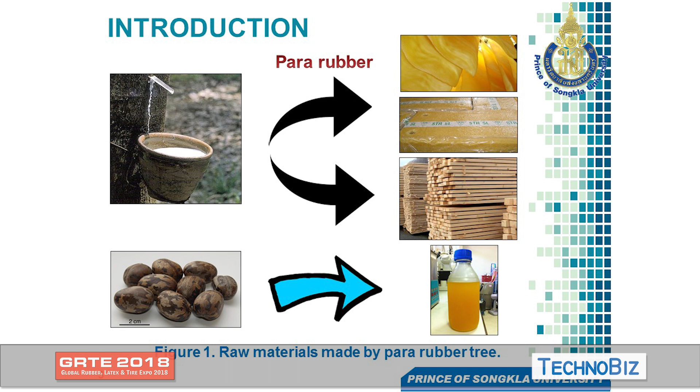Focusing on this one, we are focusing on the natural rubber itself. This is the chemical structure of natural rubber. So natural rubber has very unique properties. For example, strain-induced crystallization. Strain-induced crystallization can give remarkable properties to natural rubber. Even the cis isomer of natural rubber itself can give various advantages.

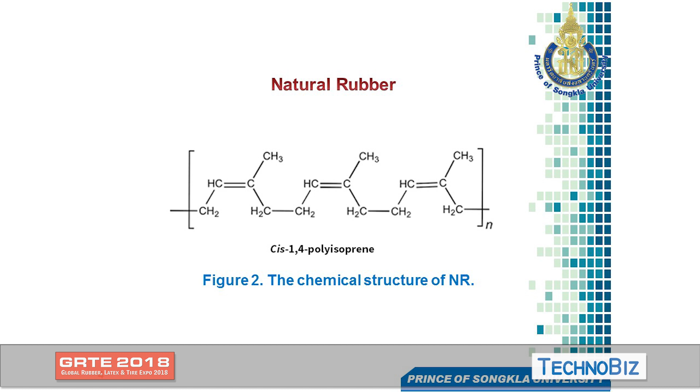Talking about natural rubber compared with synthetic rubbers, natural rubber can give strain-induced crystallization. At lower strain or lower deformation, nothing happens. It's just like SBR or synthetic rubbers. Once we apply high stretching or higher deformation, the stress upturns, sharply increased, meaning that there is strain-induced crystallization occurring in the natural rubber.

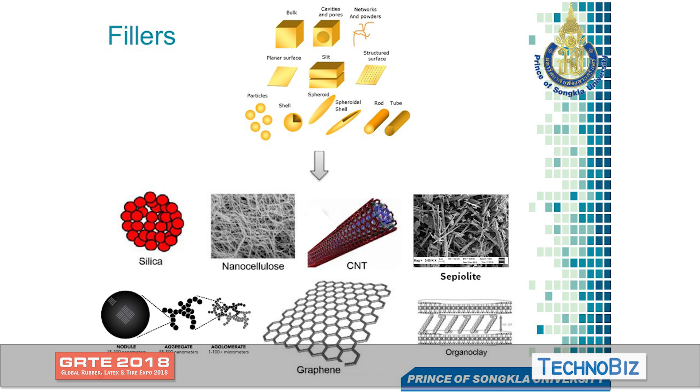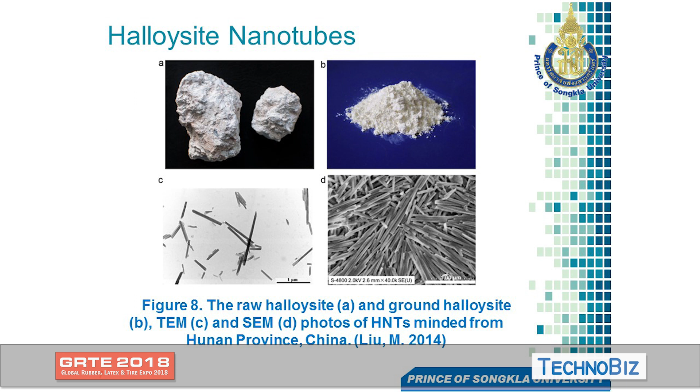Now I'm focusing on clay. So in my case, I'm studying the incorporation of halloysite nanotubes. Halloysite nanotubes are chemically similar to clay, but the difference is the geometry or the shape. Clay is normally stacked together and laminated. But in the case of halloysite nanotubes, it's different. It comes from a layer that folds, making hollow tubes, and the inner is just like this.

And it folds together into tubes. The inner surface consists of hydroxyl groups, and the edge also has hydroxyl groups, but the outer surface consists of siloxane groups. It's just like normal mineral fillers, clay or silica or whatsoever.

In this study, I'm focusing on the use of halloysite nanotubes in natural rubber and seeing what happens to the strain-induced crystallization afterwards. We have observed that halloysite nanotubes can enhance the strain-induced crystallization of natural rubber.

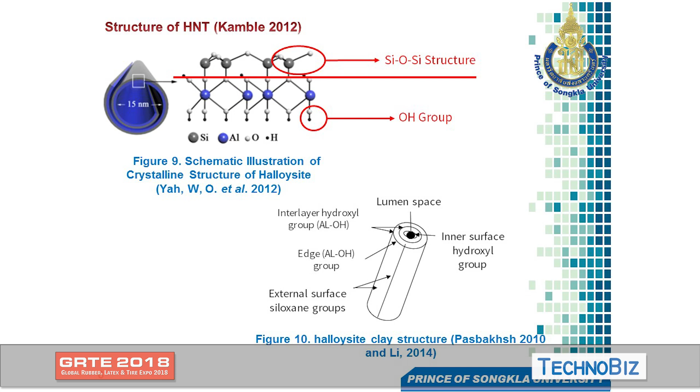Okay, before going to my experiment, let me briefly introduce some major factors affecting the reinforcement. Reinforcement means once you put the fillers inside the natural rubbers or other polymer matrices, it can improve the mechanical strength or mechanical properties. So there are some major factors affecting this kind of properties, for example, filler dispersion or volume fraction. Once we increase the volume fraction, the fillers will agglomerate or aggregate, making the properties drop drastically. There is a certain amount of fillers and certain dispersibility that can give optimum properties to the rubber composites.

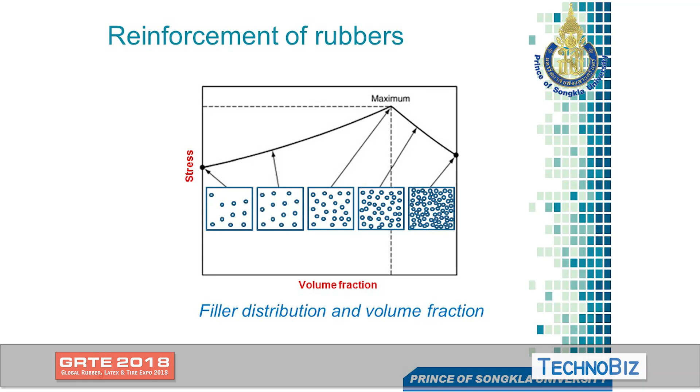Other than that, filler aspect ratio and filler shape or geometry, as I mentioned before, can also affect the properties of the rubber composite or polymer composites. Here we can see the fiber needle-like fillers. With a large surface area, it can give more contact area. Once there is more surface area, the contact area is improved, so the mechanical properties of the rubber or polymer matrix are enhanced by this kind of appearance.

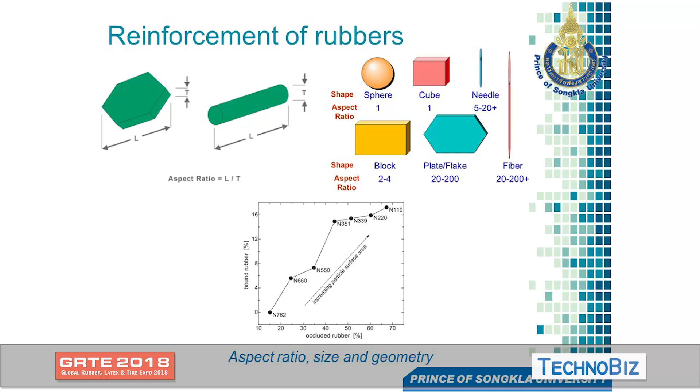So this is the example of the bound rubber content. Once we reduce the size of fillers used in the rubber or polymer matrix, it can increase the bound rubber content. So here is the example. We prefer as small as possible and as high aspect ratio as possible to make the polymer matrix stronger.

Once the reinforcement is there, normally we have to investigate the reasons behind the reinforcement. So normally we check the bound rubber content. The more bound rubber content, that means there are rubber-filler interactions. So we normally study the rubber-filler interactions in order to support the research findings.

Another thing is the Payne effect. Normally in this kind of study, we study over the strain amplitude. Once we input high strain, we see whether the filler network is there or not. If the rubber-filler interaction is there, the difference between storage modulus at lower strain and higher strain will be reduced. A small difference means high rubber-filler interactions.

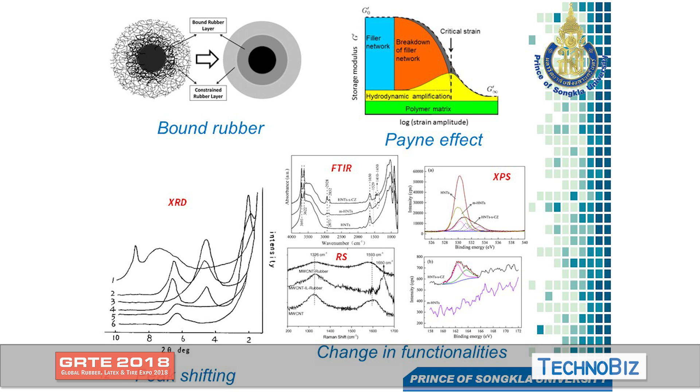Depending on the materials or what you are going to study, you choose either wide angle or small angles. So in my case, I first studied using typical XRD to see whether my peaks of interest are in the wide-angle range or not. Then we choose whether to use wide angle or small angle scattering.

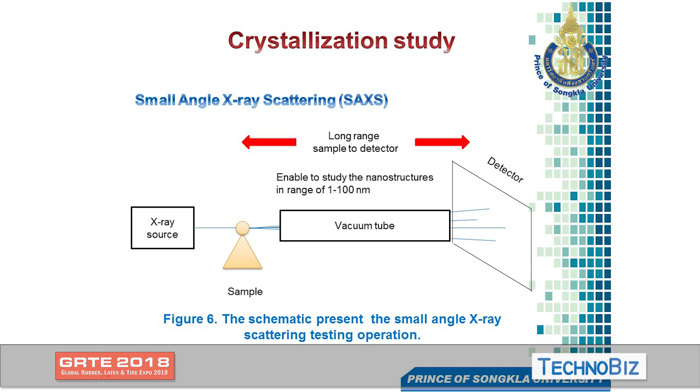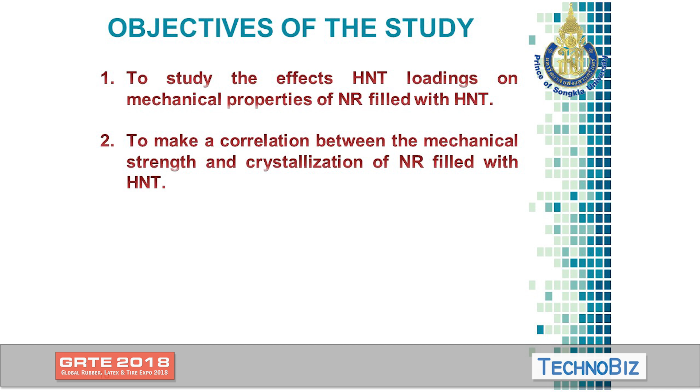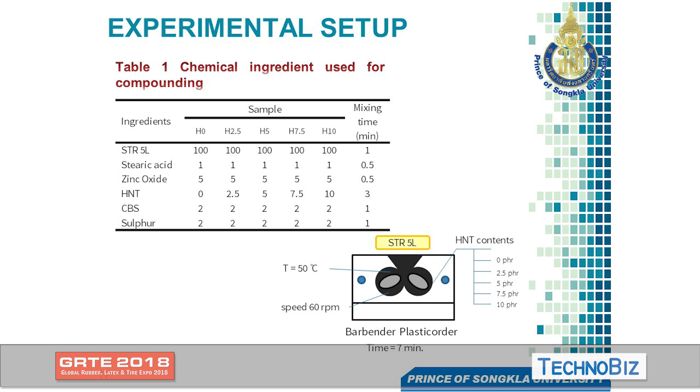Okay, the objective of my study is to study the effects of the HNT loadings on the properties, and then make a relationship between the mechanical or tensile properties and the crystallization observed after being stretched. Here's the formulation and preparation. The composite was prepared in the internal mixer with a certain temperature and rotor speed, and the loadings were 0 to 10 phr.

As for the testing analysis, we study the curing characteristics and tensile properties. And the next one, the wide-angle X-ray scattering. So we study the degree of crystallinity and orientation parameters to see whether the orientation is an isotropic or anisotropic alignment.

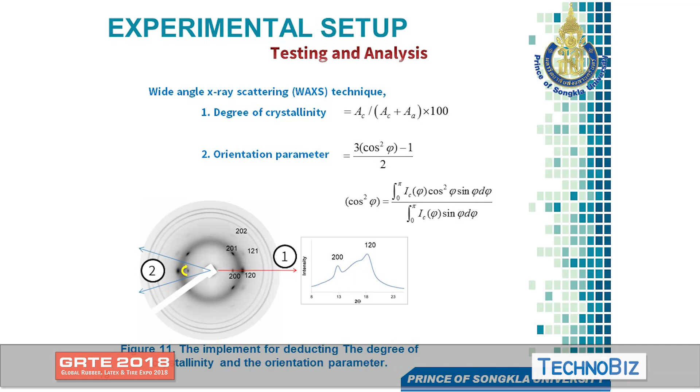Here's the result of the curing characteristics. This is very common for clay materials because they consist of silanol on the surface. So basically, it will absorb the accelerators, delaying the vulcanizing process. So this is very common.

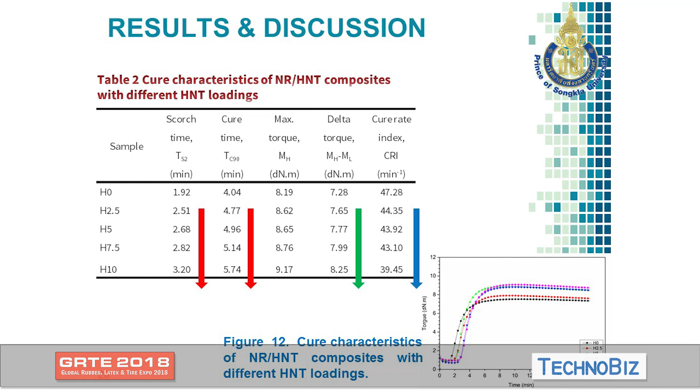And the maximum torque and torque difference are also typical findings because we include solid or rigid fillers inside the rubber matrix, making the maximum torque and torque difference increase. This is a very typical, common result.

Okay, this is the typical, common XRD, without being applied with wide angle X-ray or small angle X-ray. So here we can see the peak of interest of the HNT, which is at 12.13 angles. This is the crystal peak of HNT. This is just to confirm whether the HNT is there or not.

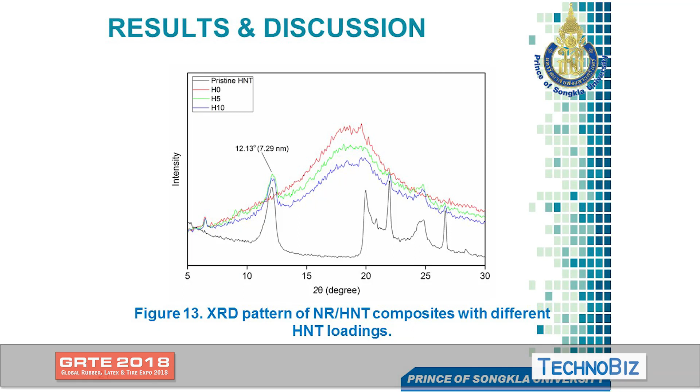So once we include the HNT inside the rubber, this is the crystal peak of the natural rubber filled with HNT. We can see it's like a stoop here. So this is like an amorphous region. If amorphous is there, it's like a stoop over here. So the curve is not linear, as it is in the case of HNT.

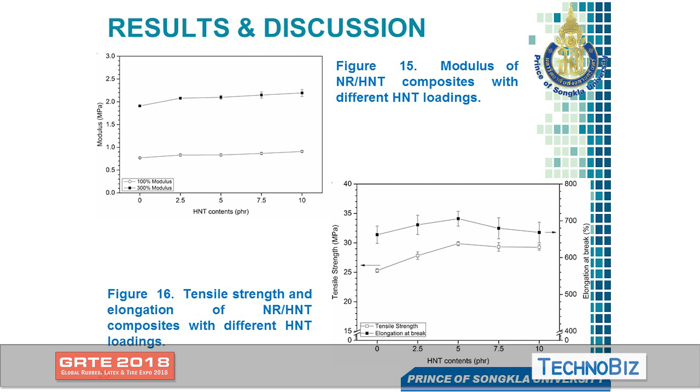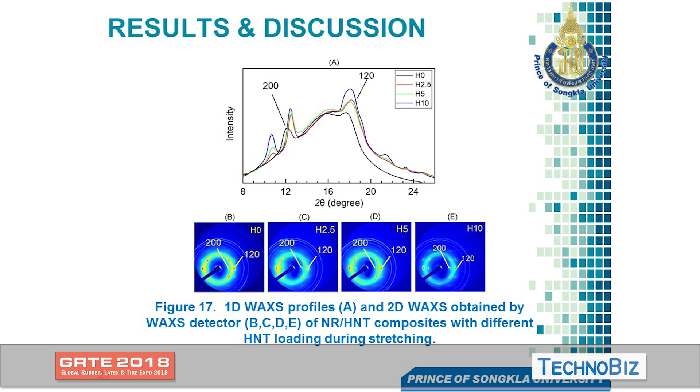Yes, once we pick up at a certain angle, we can see here, once we increase the stretching or strain, a distinct peak occurred. That means there is crystallization occurring after being stretched. This is very common for natural rubbers. But the thing is, over here, the peaks are totally different compared to the normal case without any HNT. This is the 3D image.

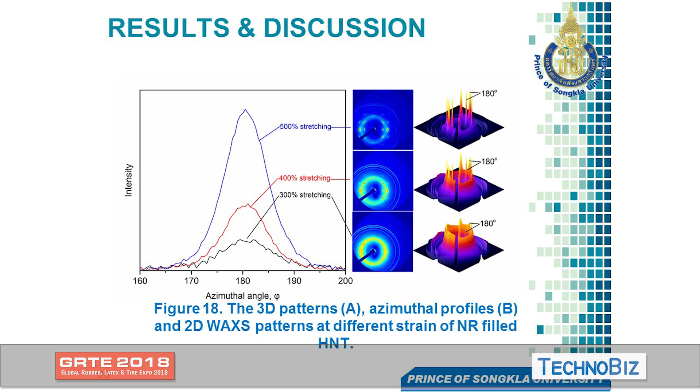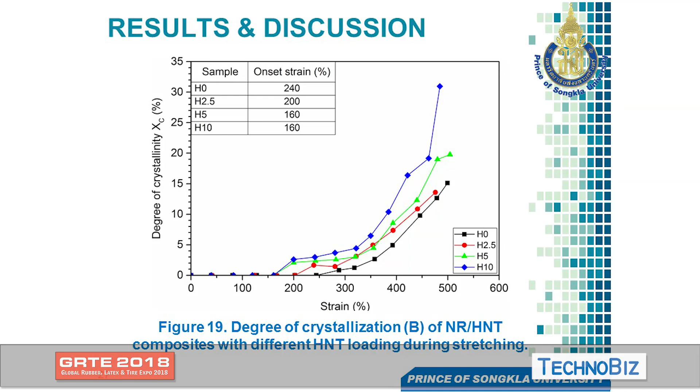Okay, we also study the degree of crystallinity, whether there is more crystallinity as mentioned before or not. So as we can see here, when we increase the amount of HNT, at lower strain the crystallinity of the natural rubber filled with HNT started to occur, compared to the unfilled one. If you see here, unfilled and filled, this figure is in very good agreement with the stress-strain curve.

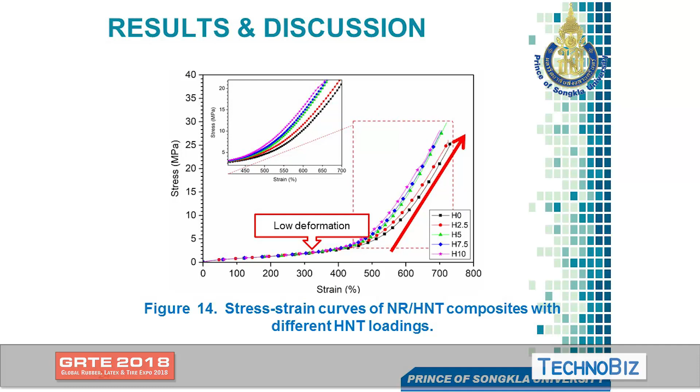Over here, it's almost the same. So that means we can make a correlation between the tensile properties and the crystallization of the natural rubber filled with HNT.

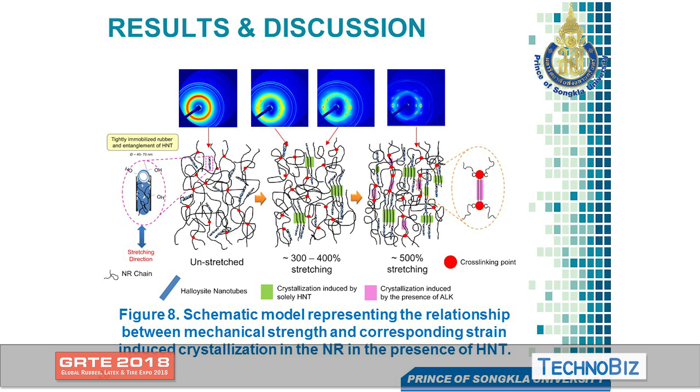Without HNT, this kind of thing happens at higher deformation. Once we include the HNT, the HNT can rearrange together with the molecular chains once strain is applied. Due to the better dispersion and compatibility between HNT and natural rubber, it can enhance this effect. That means HNT can improve strain-induced crystallization in natural rubber.

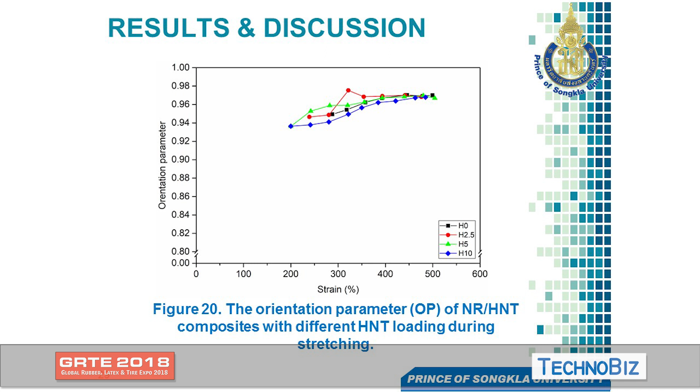But the most interesting thing here is, once we put a higher amount of filler at 10 PHR, the orientation parameter is lower than other additions of HNT, assuming agglomeration is there. Once agglomeration or aggregation is there, it changes the alignment of the stretched molecular chains.

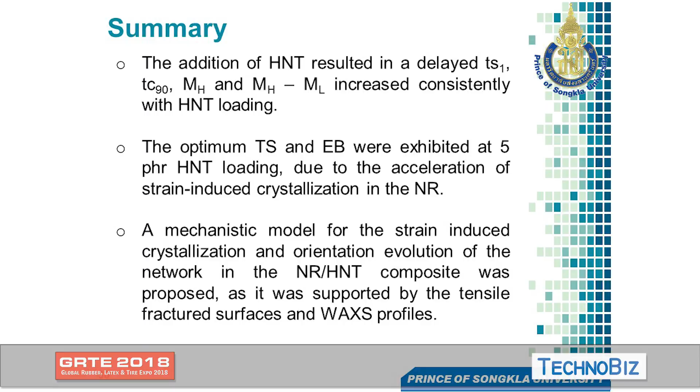Here are our concluding remarks. As you saw before, the scorch time and cure time are longer once we include the HNTs. The maximum torque and torque difference are typical findings, because we include rigid fillers, reducing the fraction of rubber, so the maximum torque and torque difference increase. Optimum tensile strength and elongation at break we observe at 5 PHR.

We also made a relationship for strain-induced crystallization with and without HNTs. Once we include the HNT, it lowers the strain required, at lower deformations. We need only low deformation to start crystallizing the natural rubber composites.